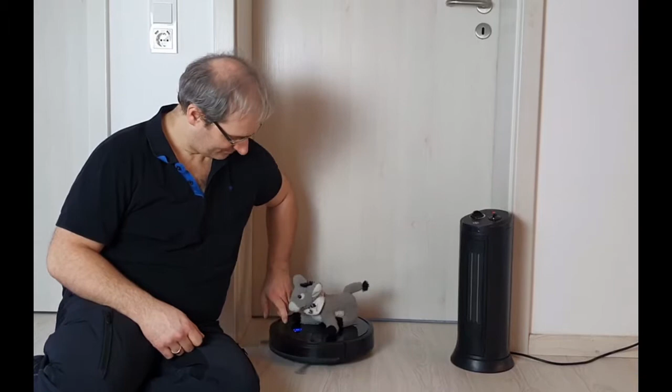You all use more or less of these devices with more or less automation. But if you think about automation, you have different things in mind. Nowadays, flying taxis, autonomous cars, or even home automation, where the light is switched on following you on your way to your office. But automation has different levels, and you will see that even these small devices have a lot of automation in it. I would say that automation is also something like the king's discipline in information technology. So we will have a look now into the subject of automation. Welcome.

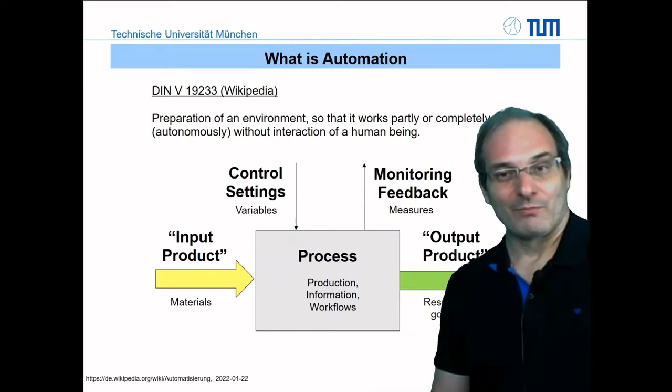This means that you will always have these scenarios - whether it's a cleaning robot, a completely autonomous radio telescope, or a robot in any factory, it's always the same principle. And therefore, if you think about automation, you will see that there are a lot of different levels. As I said at first, if you think nowadays about automation, you directly have in mind these autonomously flying taxis or whatever. But even a small heater has a lot of automation in it - it switches on and off according to the temperature, and for example, it turns left, right autonomously, and it can be used for heating without any interaction, but it's based on electric and mechanical components. So you have different levels, and therefore you have also different levels of tasks to do.

If we start with the lowest level, this is manual processing - so there's no automation at all. This is what we usually had in factories. Then you can change to the so-called batch processing. What does it mean? In batch processing, you still have a lot of human interactivity, but in factories you have these pipelines, so you have different steps and people work at these different steps. It's already some kind of automation, because the people are already supported by equipment. Then you have assisted processing - this means that, let's say, robots help you.

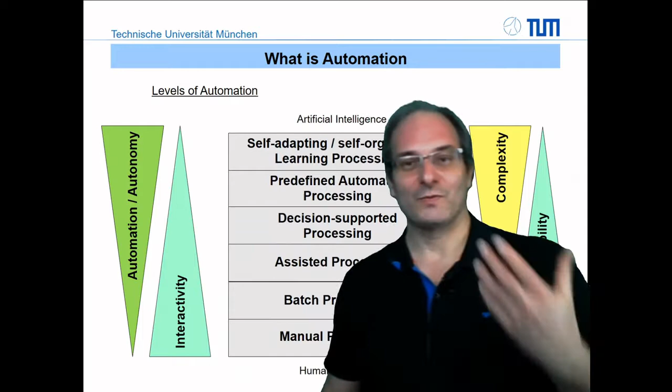So there are a lot of facts, a lot of things. We don't want to take care of these law and order things. We just want to take care of the computer science aspects, and therefore we want to have a look into these steps, what is necessary for automation and autonomy.

For me, there is a big difference between automation and autonomy, which means that the degree of independence and autonomy is really high and without failures, so that no human has to interact. Automation is everything where, for example, complete tasks are taken over and people don't have to take care of it. So like the cleaning robot, this is automation for me.

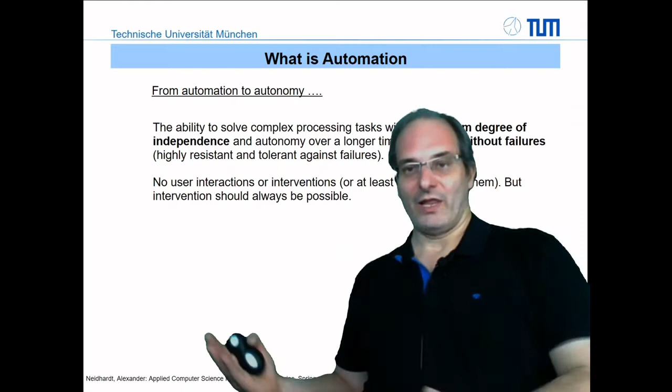Autonomy is that decisions are also driven autonomously, so no user interaction or intervention is necessary anymore. Even nowadays with these autonomous cars, this is not reached at the moment. But in cases like the airplane, intervention should always be possible, so the humans who are in the way to control something should be able to at least interact with the system.

And therefore we directly come to my defined units of automation, or at least then also autonomy, the implementation units, which I define as hardware driving, controlling, failure management, planning, and user interfacing. This is defined, I found this in one paper, and I adapted it to a situation based on my field of work in geodesy, for a laser ranging system.

So you have the laser ranging system. In this case, you have incoming data, information or products, such as which satellites are available, where the positions of the satellites are, things like that. And then you produce outgoing products, which are the observations, so the distances to the satellites or things like that.

And to do this autonomously, with these units, again with planning, controlling, hardware driving, failure management, and user interfacing, these are the center parts. Hardware driving and controlling is a very essential, closely related thing. Then failure management, which must be at least a beep or something that tells you an alarm situation is given. So all of these central parts are really essential.

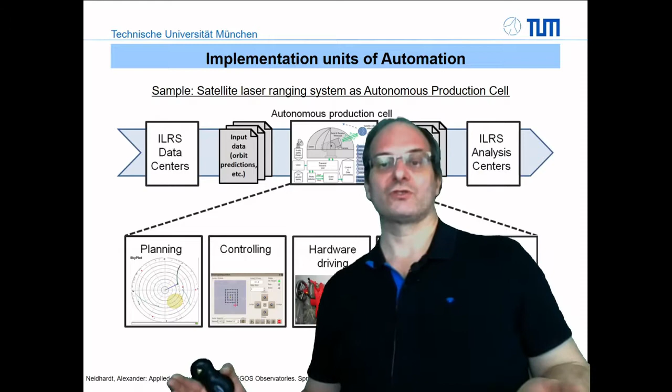So what is an autonomous production cell? An autonomous production cell controls selectively things to solve autonomous functionality - planning, controlling, user interfacing, hardware driving, failure management for specific tasks. And this is for the whole production.

So they decompose a complex autonomous production into small pieces, into small cells with self-similar small and manageable units, and keep the performance and characteristics of the whole cell for their smaller tasks. So you can have a complete view, always with these five parts of planning, controlling, interfacing, and so on. And then this huge view can be split into small pieces so that each single task in this complete autonomous production cell can be seen as the same setup again for a dedicated purpose.

So each cell is something like a copy of the central control facility and keeps itself alive. So it can be a hierarchical structure, it can be just one cell, or it can be a hierarchy, so that you always have a combination of cells in such hierarchy.

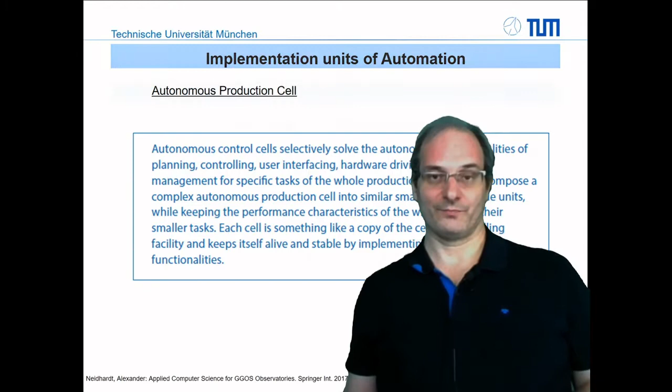So we did this for some of the observatory tasks, especially in laser ranging, but also for observations with radio telescopes. And therefore, I want to take a look into these special things like hardware driving, controlling, and so on.

So what is hardware driving? Hardware driving means we focus now on the real connection between, let's say, the software part or electrical part to pure hardware, like this gear here, or a huge motor or servo system.

There's a lot of work to do, and let's have a look onto this lowest level, and I would say this is regulation. It's not this what we think about automation - it is already automated, but it's more or less regulation. It regulates something according to incoming information.

So in this case, the simplest version is a heater. You saw it in the intro. It's a power supply, you have a switch, and you have a heating. If you have it in this way, it's completely manual. So you have an actor. This actor is closed, and then the heater starts to heat. It becomes warmer and warmer, but you have to switch off again.

So this is an on-off actor. This is the simplest version of an actor. On the other hand, you can have, of course, something like adjustable resistance switches, so that you have a possibility to do something like this.

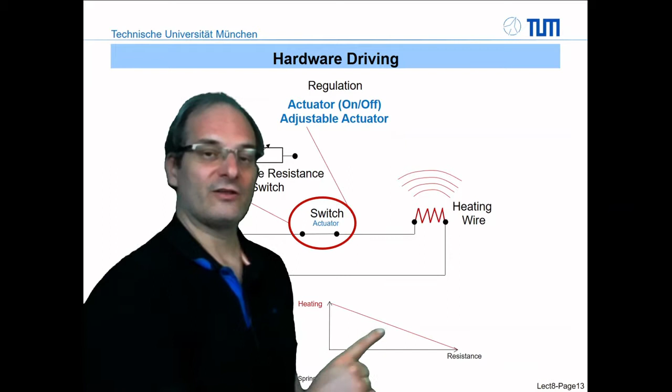For example, the heating or the power, the current which goes through it, is the highest as smaller the resistance is, and then you can regulate how the heating or how powerful the heating is. So therefore you have adjustable actuators and you have on-off actuators.

Let's focus on these on-off actuators. These on-off actuators are at this point manual. So you have to switch on or you have to switch off. But with a simple equipment, with a mechanical hardware, you can easily change this. So you take a bimetal switch and then you have an actuator.

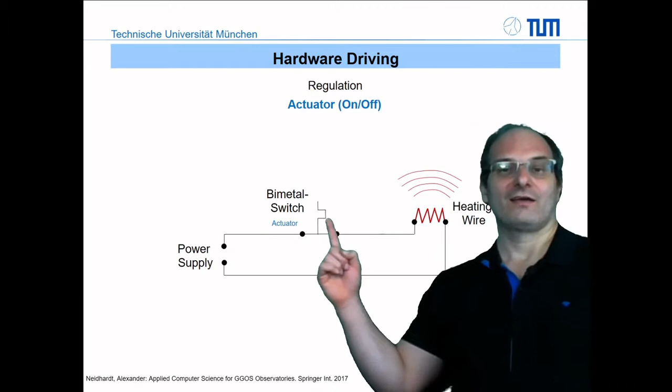This actuator can now be used for the heating detection. For example, the switch is closed, the heating starts, so it becomes warmer and warmer, and then this bimetal part detects the heat, and then it can switch off according to the temperature. So what we have now is a simple sensor combined with an actuator, and in combination with this you have something like a feedback loop. The temperature climbs up, and at a special temperature it switches the circuit off. So we have a sensor combined with an actuator, and this defines a feedback loop.

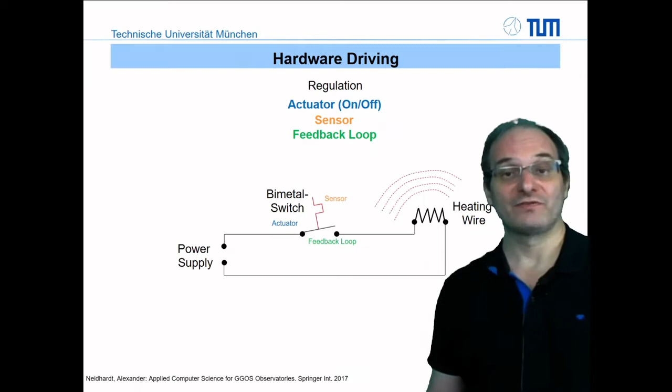So this is the simplest elementary form of automation. In this case, it's more what I would say regulation, because it detects something and it reacts on it, but it's the simplest form of automation. This is the low-level version of automation. In principle, what you have here, this bimetal switch, is a mechanical part combined with electrical switch and things like that. So you can have mechanical, electrical, electronical regulation at this point. It's really, let's say in most cases, hardware.

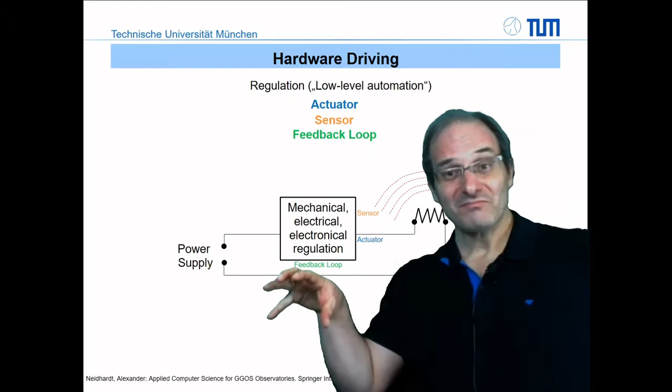This is also what you have in very complex systems. On the one hand you have the physically controlled system, the thing you want to regulate. Then you have the actuators, which are in principle a conversion from special voltages and currents. So you have a converter from a digital to an analogous signal, then a servo driving system which matches it, and then an actuator element which controls the physical device.

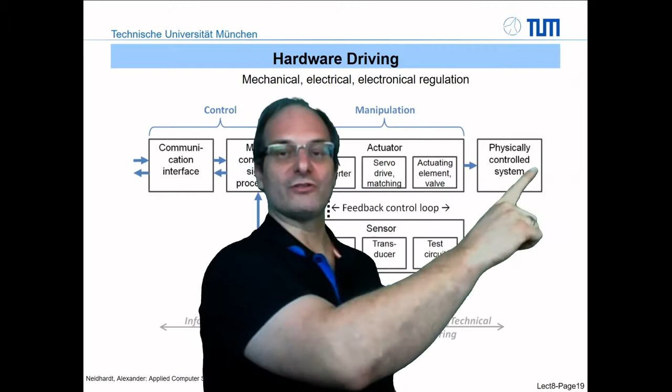On the other hand, you have the sensor. The sensor detects this, and there are test circuits that detect this physical equipment and convert it, like a converter, into a digital signal again. This is the feedback loop to, let's say, a microcontroller.

In the first sample we just had hardware, just electronic or electric parts, but in this case we already have a microcontroller processing these things, and then you have a communication to control all of these pieces.

Let's look at it again. This is the basic part of communication with a physical device. On one hand we have the physical electrotechnical part, the physical controlled system with all the circuits to convert between a digital situation and a physical, mechanical or hardware-based situation. On the other hand, we have the information technology, the engineering for the computer science stuff.

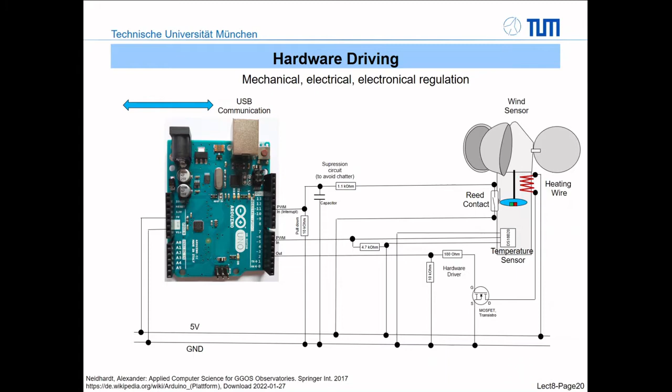Let's have a look at a small sample for that. We want to do the regulation of a wind sensor, and we want to do it already with a small microcontroller. So what we have here now is a microcontroller, in this case an Arduino, and on the other hand we have a wind sensor.

We have this wheel here detecting the wind, not the direction but only the wind speed, and it detects it with a very simple sensor. It's a reed contact, which uses a magnetic part—this magnetic field switches the sensor and produces pulses, and these pulses can be counted. If you have these counts you can convert it to the wind speed, directly to kilometers per hour or meters per second.

What this sensor also has is a temperature sensor. With this sensor you can measure the temperature, and you can use it for switching a heating—for example, in a winter situation, so you can melt down snow or ice from the sensor. So what do you need now?

You have on the one hand the IT, and on the other hand the hardware. You need something like a conversion, and in this case we do it with a very simple circuit—just a few resistances and a few capacitors, things like that, or transistors or MOSFETs like here.

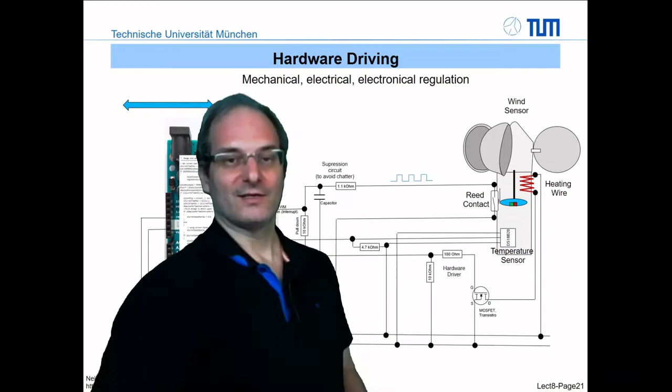Here runs a program, software, which reads from the sensor and converts it to commands or switching pulses or switching situations of the heating, for example. It counts the pure data required with these pulses, and it also regulates additional parameters like the heating. For the heating, on the other hand, I have to jump to here.

On the heating side, you have to think about special behaviors, like hysteresis—so, for example, the heating switches on at 0 degrees, but switches off later at higher temperatures, like 1 or 2 degrees, so that you avoid constantly switching on and off if the temperature is not stable and just toggles around 0.

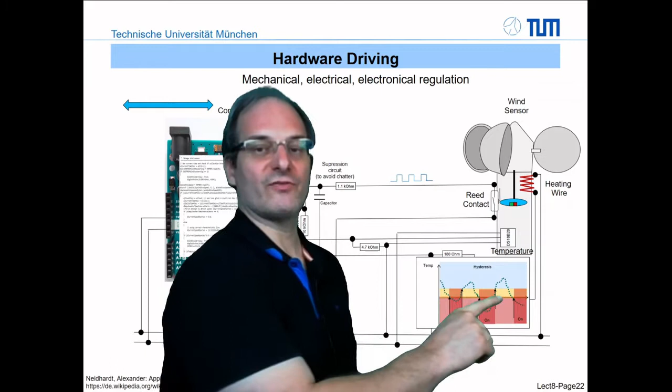So you have special periods where the heating is switched on, and special periods where it is switched off. The switching on happens at 0, for example, and the switching off happens at this higher level. You have to think about this in your program and deal with it, and you have this conversion so that you can control the hardware with your IT on the other hand.

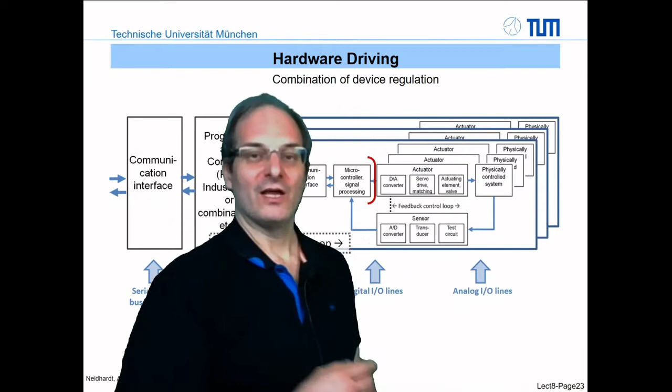So with this microcontroller and the communication, but now you have a higher level communication, and also more CPU power, more throughput. What you have in this scenario is you still have feedback loops. So you have a low level regulation loop, and a higher level that's still a regulation loop. This is the difference, it's a flowing difference.

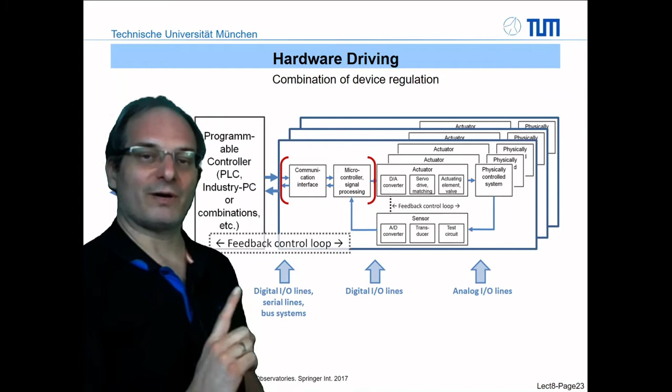So if you think it's complete automation at this point, or if it's just regulation - what you have in this explanation is these analog I/O lines, these digital lines, and then high level buses or communication equipment like serial communication lines or bus systems, and here maybe you already have Ethernet. So step by step you reach a higher level of automation - a higher level of regulation in this case - and you can also already integrate higher level automation decision making. It's a very fluent process.

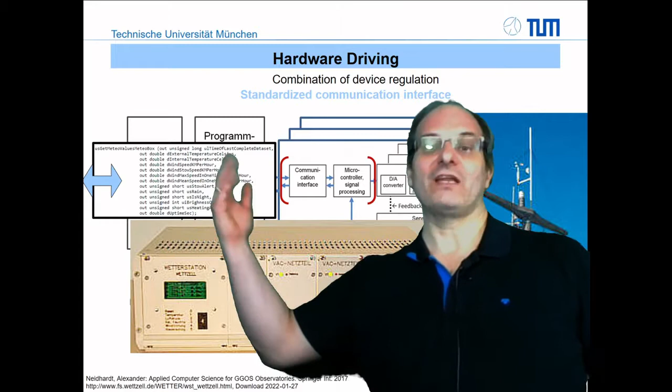As I explained, this is now the situation of a meteorological station or weather station. You have again a program with clearly defined interfaces, which combines a lot of the sensors. So you not only detect wind speed, but also this heating control and detection of current temperature - this must not be part of this high level part. It can also already be part of this hardware regulation. But if you also want to detect if it's raining and if it's cold, so that you can guess if it's snowing, then you need information from other sensors, and then it can also be part of here. So it depends on the developer, what and where these parts are realized and implemented.

So this was hardware driving - this is the essential lowest level part, and most of the work is to design and write things for this adaptation to the hardware.

The next step is controlling. I already told you that controlling can also already happen here in the hardware driving - it depends on the design. But what I think about controlling is this high level control of a lot of these hardware things. So you're now at a very high level, and here I would say is the real automation, what you think is automation.

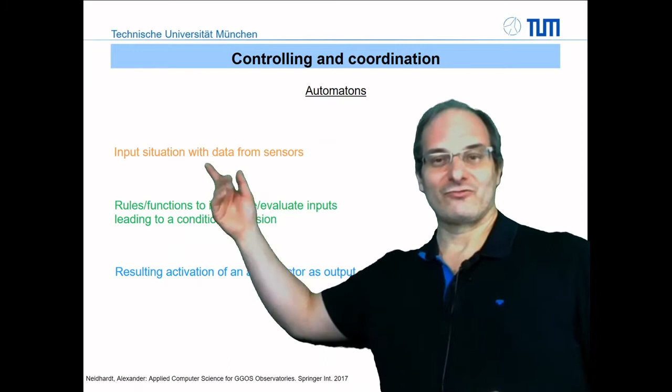Controlling is really closely connected to hardware, and it's also really closely connected to failure management, so it's a very essential part for the control. What does it mean? It's exactly what I explained about automation or regulation - the same step again. So you have input situations, input signals from sensors, from this complete hardware - it's not totally the sensor anymore, it's something on a higher level.

You have rules and functions, but higher level rules and functions to interpret and evaluate these inputs and to guide conditional driven decisions. Then you will get a result, an activation, or something which is the output of this device. You should already know something like that, because we had it in our other lessons. Do you remember?

You have input, you have something which defines what happens with this input, you have clearly defined steps and functionalities, and you have output, and then also the resulting movement of the read and writing head. We have this in the case of a Turing machine, a state machine, an automaton. We had this already for languages, for the detection of languages, but you can use the same principle also for these automation things.

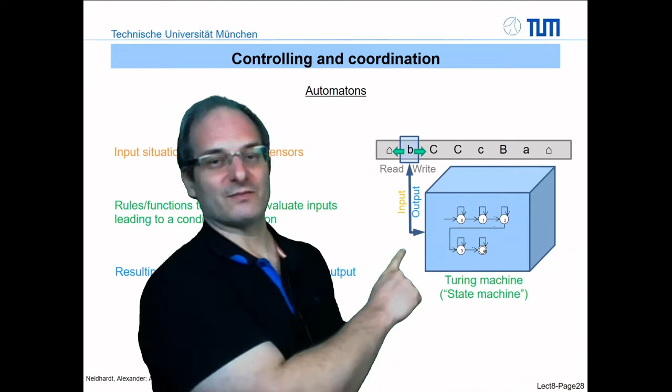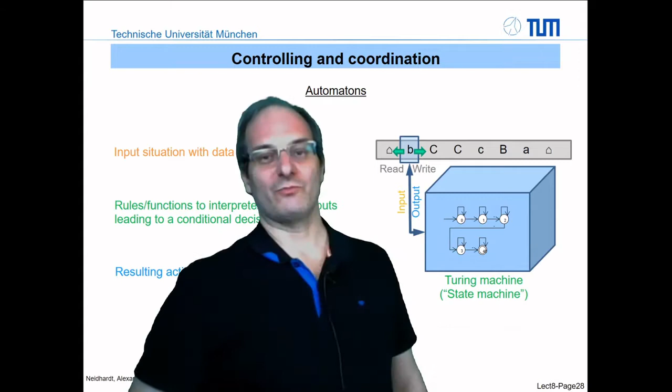Maybe not as a pure Turing machine, because this theoretical construction is too bulky for real implementations, but the principle is the same. This idea of using inputs, going through a clearly defined set of states, and then defining outputs is the same. So what do you have?

You have something like a loop around this state machine, about these states. You have input, you have also memory. In the Turing machine you have these clearly defined tapes - this is the theoretical construction, but here we can use any type of memory. We have inputs from the devices and we produce outputs. We send something to the device, to the actuators, and we also store something on our memory. So you have a state machine, a continuous feedback loop, and you follow the steps according to memory situation and the inputs.

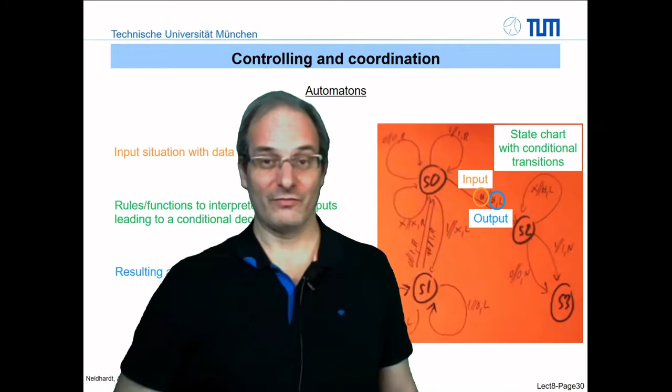So this is what we have, and you already saw something like that in the theoretical computer science part about language theory. We had input, we defined the input with these things. We have these arrows, these edges between the states. We have clear states, we have clearly defined end states, and for each arrow, for each transition, we have clearly defined outputs which tell us what is the action or reaction on this input. So we have a conditional transition which defines all of these runs or paths through our states.

If we do this, we will always be in a clearly defined state. It cannot happen that we are in a situation which is not defined. It can happen that we will not leave such a state anymore because this transition is not defined, but it cannot happen that we reach a situation which is not defined here. So for failure management it's essential.

The conversion from this to here, I already showed it to you in one of the samples, to program this conversion language. What you have is a while loop, a never-ending while loop, and you have these switch case states, and at each position you have a conditional decision which defines the next state. It also tells the tape or the memory what is the resulting product or resulting information, so the output, and then it jumps to the next state.

So if we are in state 0 and if we read this, then we jump to here. The same is for a robot - if this happens, then do this. It's a continuous loop, and you can define clearly all of the states.

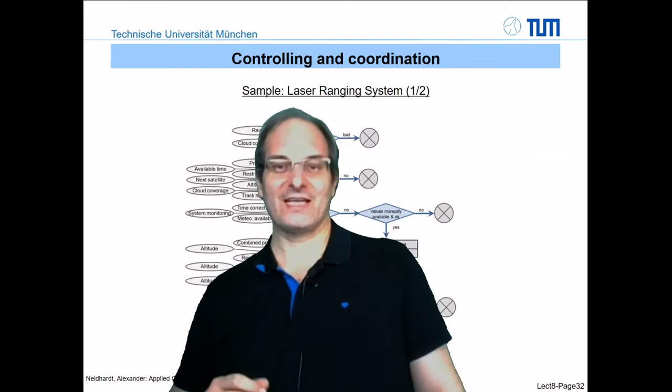For real complex systems, the states are much more complex. What does it mean? For example, for a laser ranging system, we define these states - this is a decision table. Here are the decisions, here are the inputs to the decisions, and this is the run through these steps.

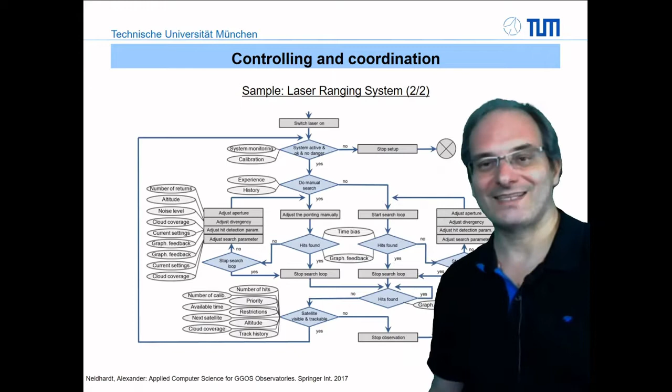These are actions which happen here, and these are decisions which are made. There are a lot of decisions to run through, so that the laser is switched on, that all of the detectors are switched on, that also the detection runs, and that detected hits - detected laser hits to the satellite, for example - are found. So it's a real complex thing, but in principle this flow chart is nothing more than a state diagram, and it continuously runs. You have special end states, special situations where it stops. This is a sample for a real high level complex system.

Each of these decisions, each of these things, is then a lot of small equipment accesses. There are a lot of device accesses, a lot of pieces of software and hardware, so it's not really simple. But the principle is always the same, and it still follows this layered system.

We already had this very low level actuator sensor system, where we have electric things. Then we had this high level programmable logic, and where we are now is this part - on an industry PC or high level computer, we have a very sophisticated control loop, where we also take care to control the timing, so that we don't propagate time or delays from the lower level sensors to higher level decisions, and that we have higher level detectors if something goes wrong, like watchdogs or safety devices, and that we really protect our data.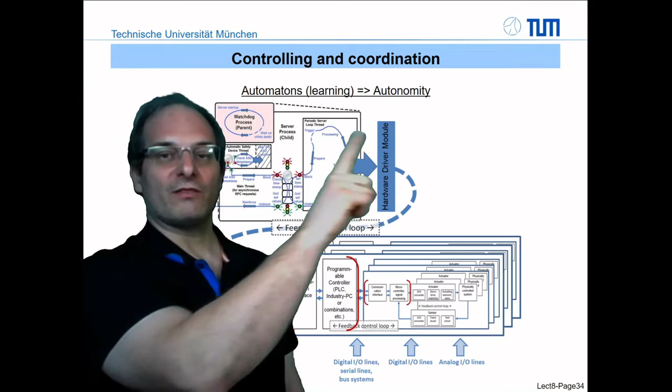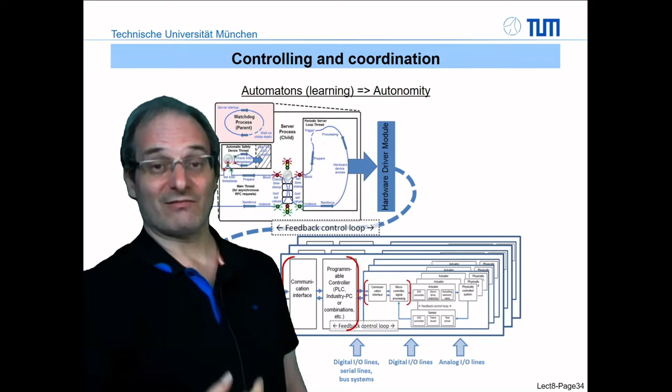So this is a loop running all the time with the states, with the state charts, and then we run and control via this way the lower level regulation. This is where it's split between automation and regulation. This part is a fluent process, so here you have more or less regulation things, there is not so much combination intelligence, and here you have this higher level automation. So on the way now, we are already really highly automated, but it's a really static process.

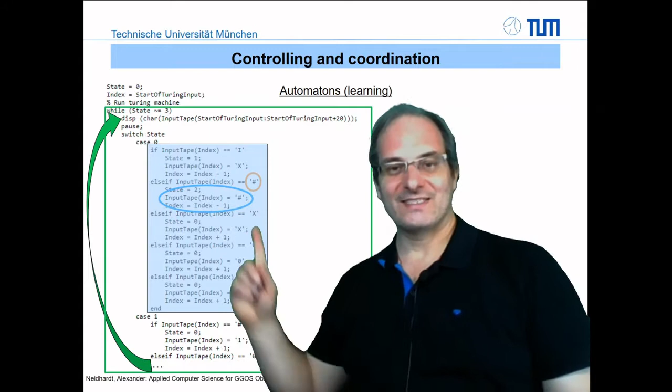So what is now the change to autonomy? The autonomy also happens at this higher level part, and it's combined with a learning system or with an intelligence system. So we have to take care of these state changes, and these state changes can be driven or implemented with a different solution, like with these systems of neural networks or other deep learning or learning mechanisms.

So therefore, if you not only use a really static run, if you adapt to different situations or to a learning set, then you can adapt your processing to a specific situation, or you can adapt it so that it's really, really efficient. Okay, so what does it mean?

The selection of the following state is now made by neurons. It's just a small outlook into these neural networks. It's a huge field again, but just so that you get the idea.

The idea comes from the human brain, so you have something like activation functions. You have something like a piece of software or equipment where you have a lot of inputs, and these inputs are weighted, adapted with some weights and can also be biased. Then a sum is created so that you get at least one number. From a lot of inputs, depending on how many inputs you send in, you get one number, and then you have something called an activation function, or sigmoid function can be used, which then decides when the output goes to a special level. It can be a binary level, or it can also be a probability or something like that, so that you have inputs and outputs again, and this is more or less automatically adaptable.

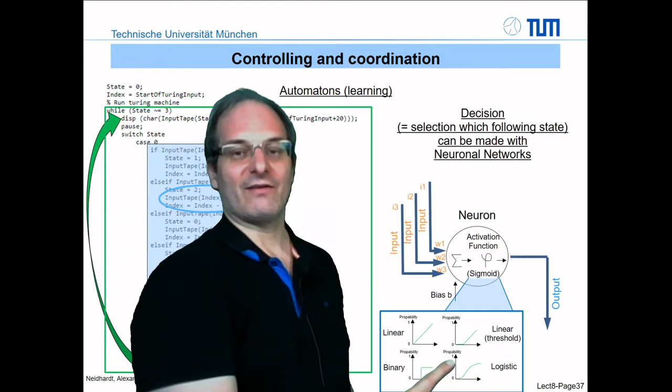So what happens here, you can have different functions, and this is the special thing where designers for neural networks have to look in. They have to use different neurons, different activation functions. For example, you can use linear with a threshold, you can use binary, which just switches on at a special input or state, or you can have these logistic functions, the sigmoid functions, so that you have different possibilities. Now this combination of different neurons - it's not just one of these neurons, you have a lot of these, and this is also why nowadays this artificial intelligence or neural networks are so popular, because now the hardware and the computers are able to work with a lot of these neurons.

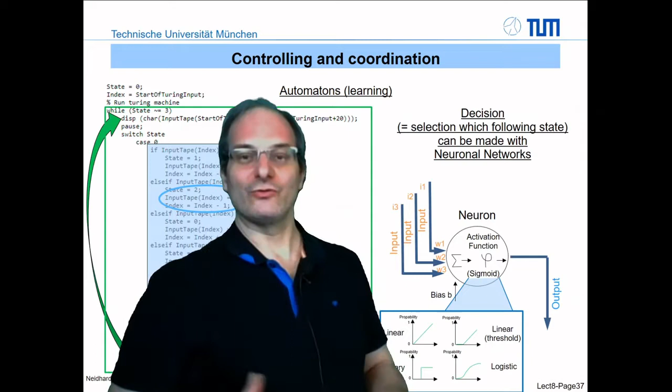So it means that you combine a lot of these neurons. The output of one is the input of a new one, so that you produce something like a brain. Well, it's not really like that - you define the network, but you can thin out or improve or make more important one of these edges between the neurons. So you have input layers, hidden layers in the middle, and output layers, and then you can drive some special outputs so that you can make decisions like for the selection or detection of signs or something like that.

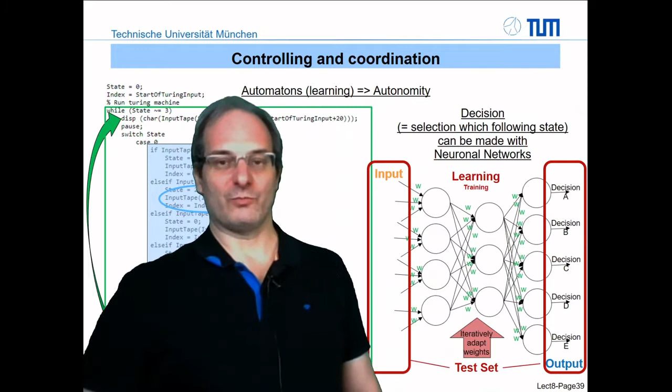So what happens now is you define a set of inputs and a set of outputs, because these neurons, these weights, must be adapted to a given situation. So the neural network must learn, it must be trained. You run through these sets so that the weights are adapted, and then a special input scenario with a special probability will lead to a special output. So therefore you have the learning step, and after the learning you have the processing step. With these weights, new situations are evaluated, and therefore you can adapt to special situations.

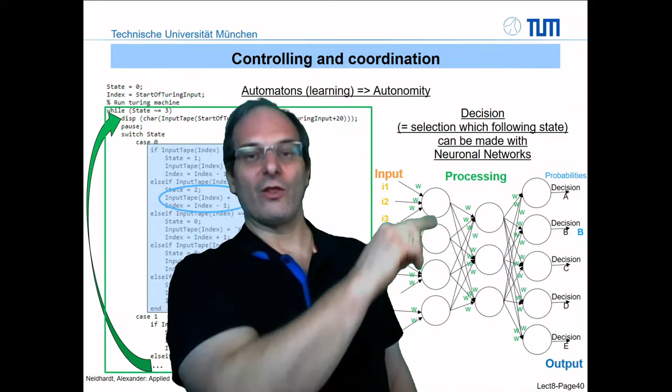So for example, you can build something like artificial eyes, or you can detect handwriting, things like that. And if you continuously learn, for example, if you use new inputs for learning, so that if something goes wrong and you get feedback by users or something like that, then you can always improve the situation.

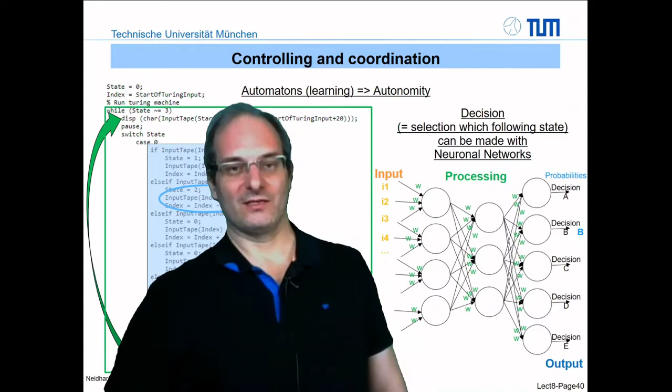So even with search engines using these neural networks, there are people behind detecting if something goes wrong, and they feed in information so that the neural network or other artificial intelligence techniques will be adapted again to the right things. Okay, so what you get then with this, this is now what I mean with autonomy.

Autonomy means that decisions are driven by the system, so it's automation with no human interaction.

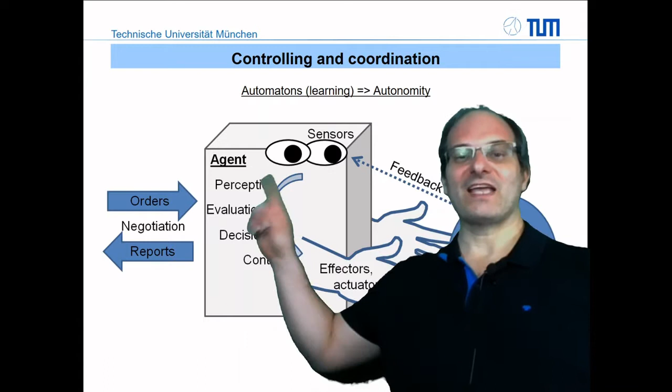So therefore you have something like a so-called agent, and this agent takes orders and brings back reports to the human or other agents. But what does it do? It uses different sensors, so in these different hierarchies, as a feedback from the environment, and then it makes a perception, evaluation, decision, and control.

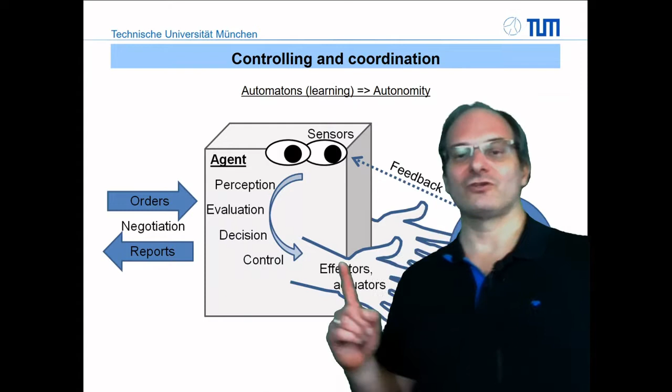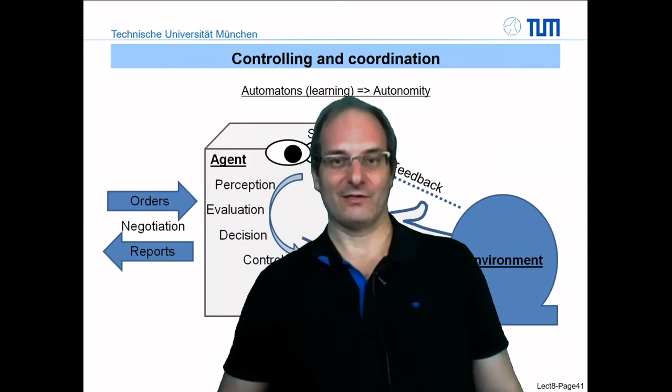So here is the neural network or higher level state chart or state machine, and with this control, effectors and actuators are forced to do some actions. So you have a higher level feedback loop, and if you go back to these different levels, you have the lowest regulation level, mainly hardware, then the automation level where you have state machines and things like that, but with some human interaction, and then this high level autonomy. This means we have different levels with different aspects of human interaction and activation.

Very important here, in combination with these two things, is also the failure management. Because if there is a failure, and if you have a completely autonomous machine or autonomously running machine, then it can happen that a failure costs life or influences human beings, and therefore this failure management is a very essential and closely connected part here.

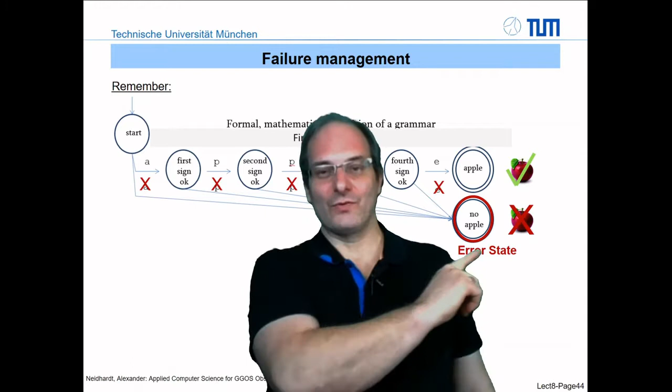You directly see that you already maybe have an idea of what failure management is, because if you go back again in our lessons and watch the state machines again, we usually define something like this error state. Even if we didn't directly point it out, each not-given situation, each not-given transition - a transition which is not possible - will lead to such an error state. So this is the lowest level of failure management: if you cannot do the transition, go to an error state and stop the machine. Stop.

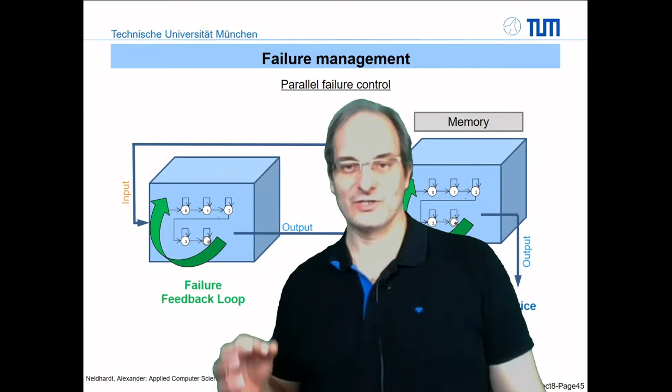Another thing is that you can use different levels of automation so that you have a parallel failure control. Here is the normal feedback loop, and on the other hand it can also use memory and things like that - you have another error or failure feedback loop that checks the inputs from the devices and combines it to a logical situation. You can use fuzzy logic, or neural networks, or just simple state machines, but it drives to an input, and this input is like all of the other inputs which influence this process. It can change the processing, or stop the machine, so it really influences the system, but it's just an input from a parallel error control. Additionally, you have of course the already mentioned state machine errors inside of both of these, so that you have controlling of these scenarios.

A simple example is here also from my daily business. Important is that errors or quality values for the processing can be converted to a metric system, so that you get numbers which tell you something about the quality, about the situation, so that you can drive decisions from that. Here, for example, in our monitoring system, we have these decisions - it's a combination of logical conditions, and if this condition happens, you have special alarm levels or severities.

In our case, we defined 4 scenarios of severities. Everything okay is green. Situations where we should be informed that something goes wrong, influencing the quality of the product so we won't have the same quality anymore, or warnings, meaning we won't have the product anymore, but still no situation where human beings are in danger, for example. So if we have this warning situation, we can reset special devices, or run through troubleshooting rules.

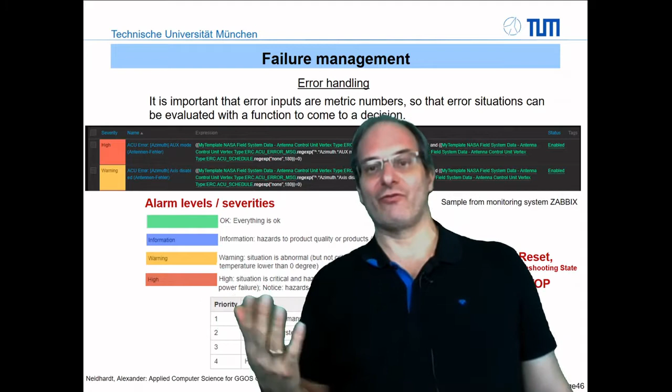The final severity is the highest one, where human beings or the machine itself is in danger, and this always leads to a stop. So we convert input scenarios, different digital parameters, to scenarios where we can drive decisions, and then we can at least define situations where we have to stop or where we have to run internal troubleshooting mechanisms.

So this means we go through these parts here. We define hazards to humans, hazards to systems, hazards to products, or to the quality. So these are our main drivers in our case.

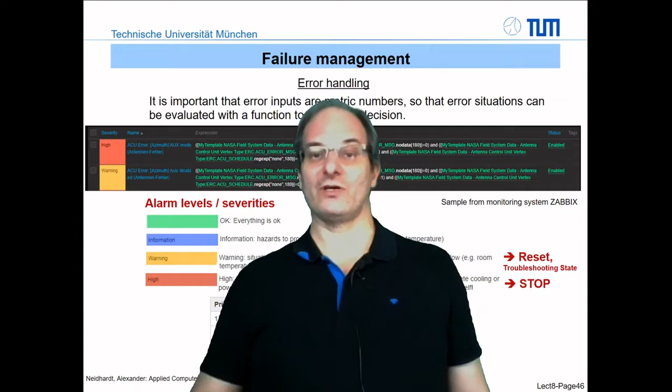And this is the elementary failure management. So here you have another state machine, but you will come to situations where you have to stop. And even in autonomous cars, you have this situation. For example, in some cases you have to stop if you cannot come to a functional result anymore.

Let's have a look into the next step, which is the planning. These three parts are close together. All autonomous or automated machines need this. The planning is the general schedule for all of these things, and it can also be done with autonomous systems or with state machines, or it can be just something like a timing. So what does it mean? Planning is the timing for the rest here.

This means that you need a central equipment which plans the complete workflows of all these autonomous production cells. So it's the next layer. You have a lot of these small devices, then you have these high level PLCs or combinations of the devices, then you have this high level automation, or also this completely autonomous production.

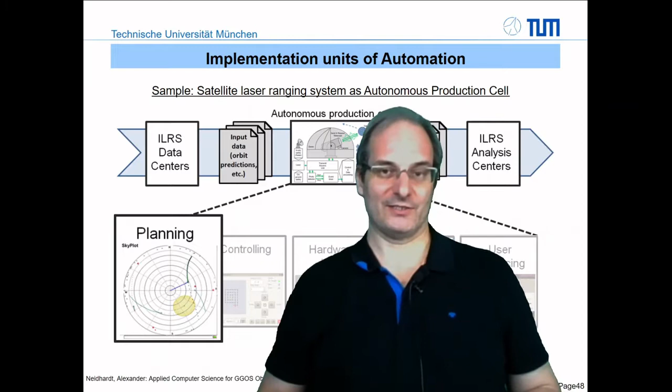And then you have the next level which controls and organizes the workflow through all of these production cells. And this is especially what you have in this equipment for the observation as well. You can do this again with a state machine, but you have to think about which possibilities for a time schedule you have. For example, if you have a cleaning robot, then you can decide that it always should start at a special time. This is already planning - it always defines a clear but static a priori start time.

What you also can do is use special sensors if possible, and start the robot only if it is really dirty. So if your flat is really dirty, you have a dynamic, but it's still a priori situation - it defines it, the whole processing is the same, but it now adapts to the situation. Or it can run through the whole house, and at the places where there is the most dirt, it will stay longer, adapting to a dynamic situation.

And this is what you can do for the planning. You can have a static a priori, for example once defined by a human being, or you can have dynamic a priori, or dynamic real world real time scenario. Static a priori, as I told you, is like an alarm watch - it regularly starts the same schedule of tasks. Dynamic a priori means at special time periods you plan the next 10 or 5 or whatever hours, and then you follow this path statically.

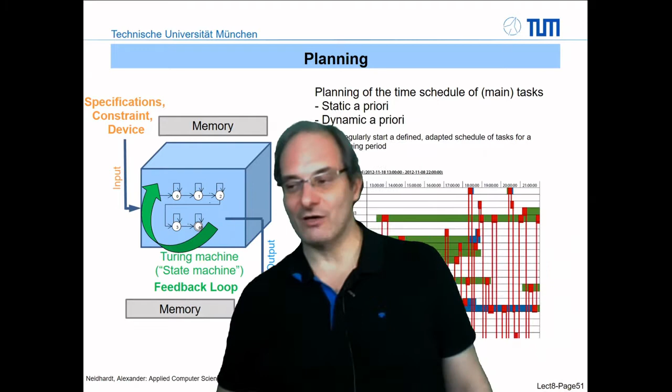So you don't think about it anymore - you use the current situation and you plan it. You have a schedule, a path through different scenarios, and you run through it. It regularly starts defined but adapted at a special time period, a fixed schedule of tasks which is fixed for the coming period. The dynamic real time approach always takes inputs from the sensors, the current situation, and adapts the next steps. It decides when to change.

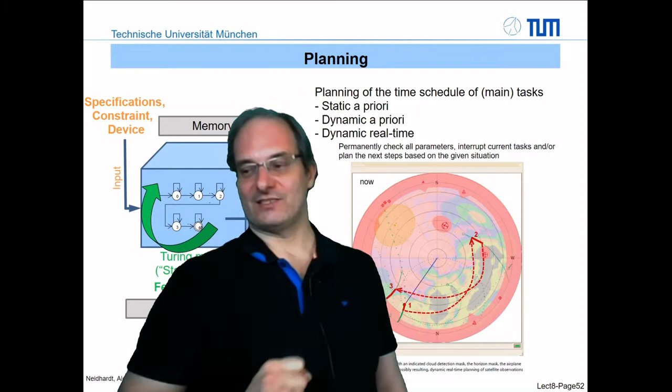For example, here we have a meteorological situation of cloud coverage, and it decides which satellite is used when, and it always checks. For example, if no hits or returns from the satellites are detected, then it again changes to the next satellite, maybe to this one, and continuously detects it. So it's a permanent check of all parameters, so that current tasks can be interrupted, plans can be changed, and new situations can be forced by new decisions.

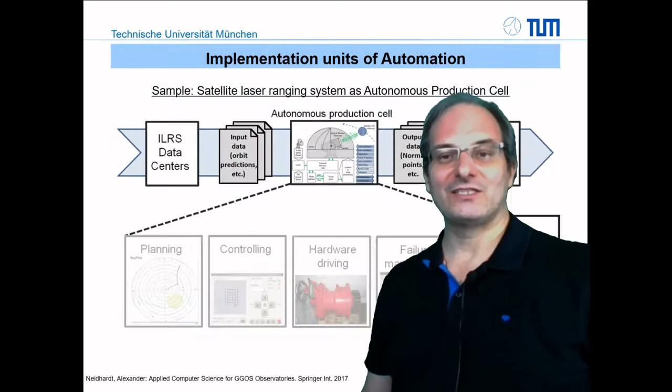So these are the steps, and of course users have to know about what happens inside - in the hardware, the controlling, the failure management and planning - and therefore you need a really nice user interface. Nowadays user interfaces are really important, so we are now at this part, the autonomous production cell, and nowadays user interfaces are mainly based on web pages - some kind of special web page, static or dynamic.

So in this case, this is the web page for our radio telescopes, or you have also a web page for our failure management system, for the system monitoring, so that you see if there are failures and you directly detect it, at which building, for example, a guard has to go to change, to switch things and work with it. So these are parallel systems.

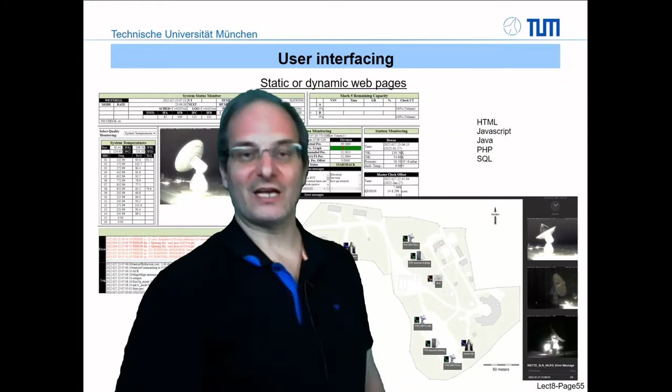For example, for the real control, we have this scenario, so separate error detection is used for the real processes here. In this case, you have to know something about HTML, which is why I told you something about HTML in one of the lessons before. But this is what you did not learn in my course: you also will have to use JavaScript, Java, PHP, or SQL, because if you want to connect something like databases, you need this connection language, this interface language.

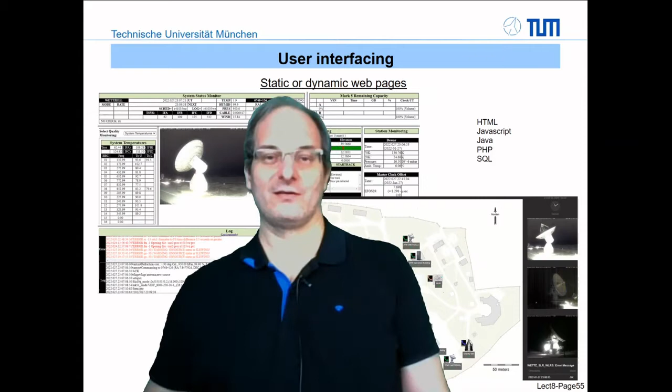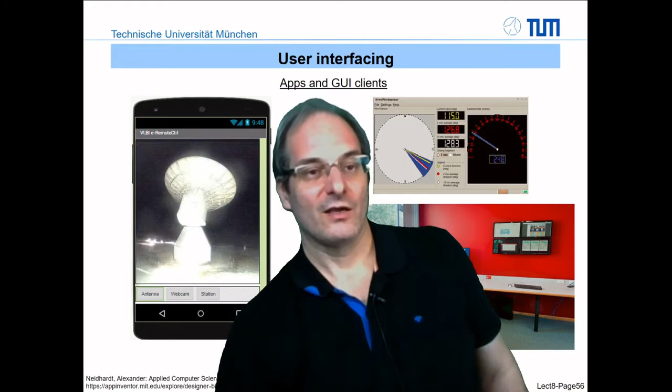So if you have this, you have to think about how good your automation is, and therefore you have to think about simulating your programs. You already know something about simulation. We talked a little bit about this during the discussion about algorithms and also about software development, and it's very similar to that.

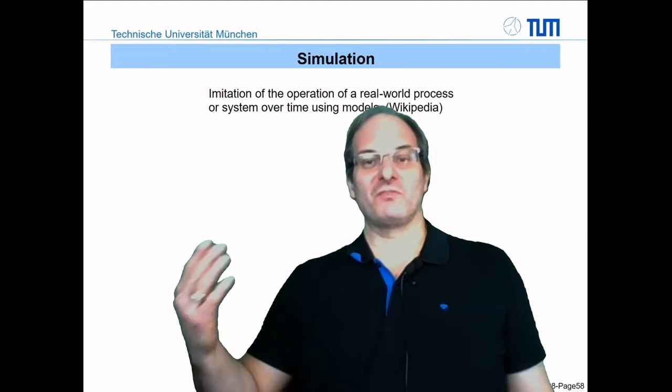And therefore we can use the same principles. So what is simulation? Simulation is the imitation of the operation of a real world process, and we do this in an artificial environment, and we check how this real world process acts or reacts over time. For that we have to use special models, assumptions, and special models.

So in the best case, before I do some theoretical explanations, I'll just show you some samples. They are based on things like that. Remember we had this for software development. So the earliest position to do a simulation will not cost too much money, because if you've already produced some hardware or software, then simulation is quite expensive. So therefore you have to think about how good your algorithm is.

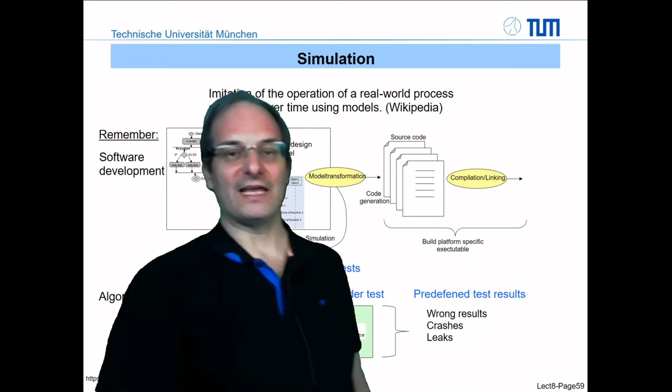And we did this check for the algorithms. We had this function under test. Now we have the system under test, and we enter the test cases with limit values, min max values, extreme values, or illegal values, things like that, or random values, so that we see if there are wrong results, crashes, leaks, or something like that. This means we will have the same classes as for algorithms. Do you remember? Correctness, functionality, or partial correctness, and also compared to efficiency and performance. So it's not only that we test if everything works correctly, we also want to see how efficient our autonomous working automation is.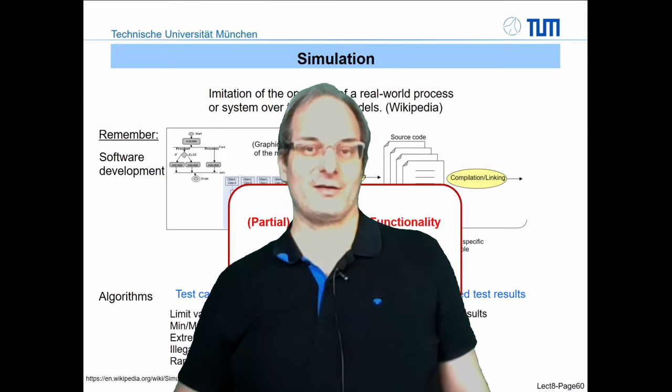Okay, so let's have a sample. As I told you, let's look into a sample. So we have the situation of a cleaning robot. We have a room, a theoretic room of 100 by 100 units, and we have a starting position of our robot, and a starting direction of our robot.

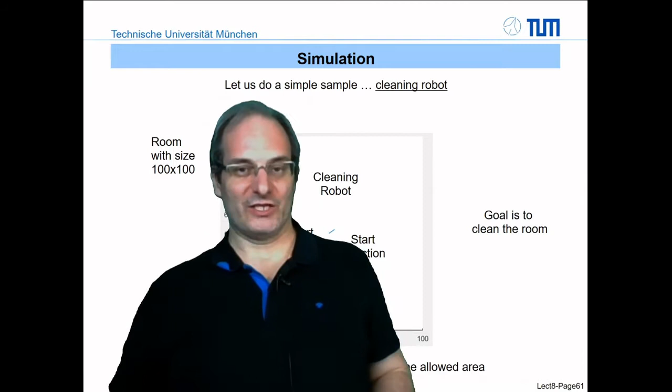Then we have to define a goal. So the room should be cleaned. Almost all positions should be touched once, and we should not touch positions several times. At least the room should be clean, and therefore we have to define an algorithm and a simulation for this algorithm. So we simulate it without any robot.

So we simulate it here in MATLAB, with a MATLAB program, and therefore our task or our state machine is quite simple. We have a starting state, and this is already the state which is kept, because each time, under this condition, if we reach a position outside of our room, we turn, for example, 90 degrees, or some degrees. So our first attempt is this simplest suggestion: if there is a wall, turn left.

Okay, so let's simulate these things. Let's simulate what happens, and we can do it step by step. I will directly show the outputs. So this is the small program. The small program defines some initial parameters.

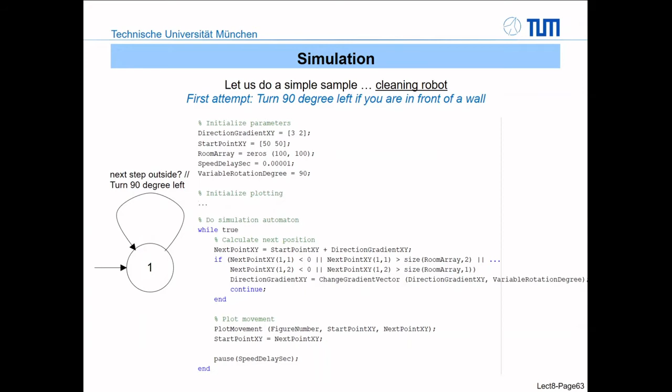So for example, we define the direction, the starting point, our room, and how fast the steps are, and which rotation degree we use. In this case we start with 90 degrees, and then there's a while loop that continuously runs. It's quite simple because it's a state machine: it checks if we're outside of the room, and then does the rotation. The rotation is done with a rotational matrix, and then we plot the current position or movement.

So how does it look like? If we do this, we have a starting situation, and then it continues to work to the first position, and continues to the next position and so on. If we reach this wall, the end of the room, then we turn left. It continues and continues. And if we watch this, we will see that after a special time period, it will always follow the same way.

So our first attempt to clean the room was not really successful. What else can we do? In this case, we reach what we already know, which is the halting problem. We don't know when this problem appears, so we don't know after how many steps it will appear. But in this case, our process will never stop because the room is not cleaned, and therefore it will always continue the same way. This halting problem you can find in the algorithm lesson.

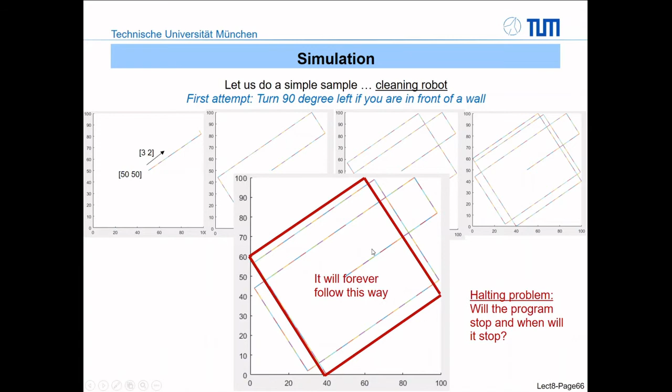So let's do another situation. In this case, we change the direction and we change the position. You will see that the halting problem also appears, and it will appear quite early. This is what's difficult to detect, when this situation happens. But all of these simulations show you one thing: that this first attempt to always turn 90 degrees is not really a good way to do this.

So let's change - maybe don't turn 90 degrees, let's turn a small degree, like 5 degrees. What happens now, in principle, is the same: it will toggle a little bit around this predefined path, but it will never leave this path anymore. But will it really follow forever? Again, this is the halting problem - you cannot say if there will not be a situation where you leave. In this case, it will - there will not be a situation where it always follows this way. You can play with these programs a little bit, and you will always see the same situation.

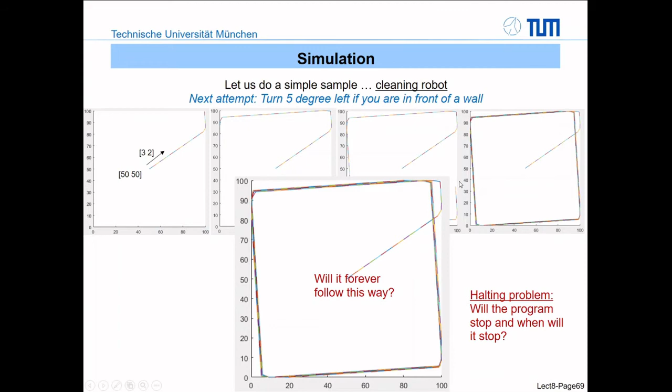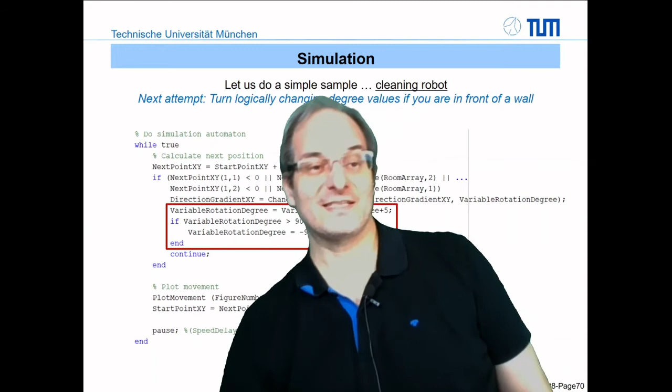So let's bring in more dynamic - more dynamic situation means we change the rotation angle each time we bounce against a wall. Let's start with a small rotation angle, then change to larger, then smaller, and so on, so that we turn left and right, but it always still follows a predefined state, and therefore it's clearly defined that you always have a small change in the rotation - it's not completely free running. Okay, so let's see what happens here.

If you run this, you'll see it looks quite nice. There are a lot of different lines, so the number of lines grow, and therefore it seems that now it really works. If you stop after a special time, it looks quite good. But does it really solve the job? And how fast does it solve the job? So therefore, our simulation at the moment is not good enough.

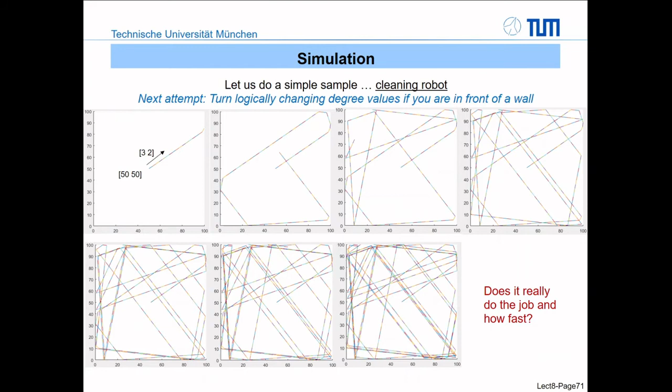So we now change logically dependent degrees, and we don't know if there is this halting problem again - if we will always follow the same path, or if it will change so that all of the positions will be touched once. Therefore, we have to change our simulation and algorithm so that it does not plot each step anymore. We want to run 100,000 steps, for example, and see how many positions are touched. It should run the whole simulation so we can change the number of steps, and each step should also be normalized - before we had different numbers of steps, now we just go 1 unit per time unit, so we have a more realistic scenario that we can use to compare different algorithms.

We will register all visited positions, so we have to set some markers, and we also have to set the markers if we touch it more than once. So if we visit positions several times, we have to see this. And we want to show these appearances, or these touches of different positions and the repeating accesses, visually with different colors.

Then we want to print the number of visited or not yet visited positions, and also the maximum number of repeating visits. So that we get some information to detect - this is what I told you with metric - we need some quality parameters which you can really use to evaluate our algorithm.

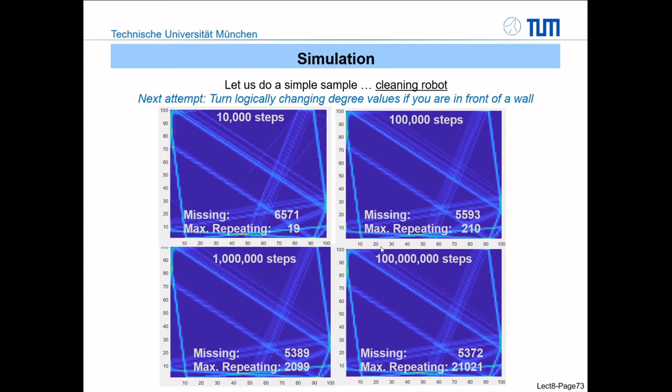So what does it mean? With additional information in this simulation, we see that our algorithm does not work, but we still keep this simple algorithm and just change it very simply. We do randomized processing - instead of changing the degrees periodically from -90 to 90 degrees, we now completely randomize, or do a randomized calculation of these degrees.

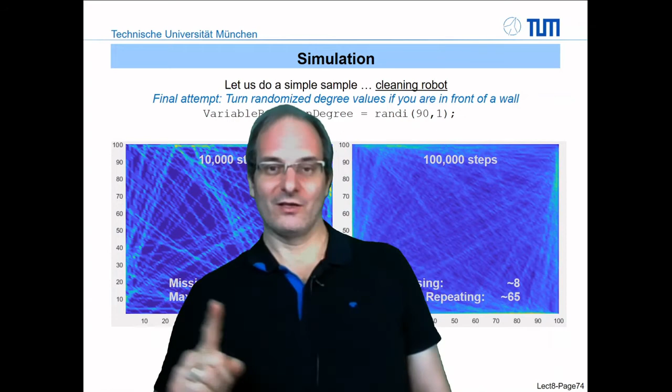Why did I make this about sign here? Because each run is different. So it can happen that you have hundreds of missing positions in one run, but now we have to evaluate in the mean how good it is. You can reach really good runs, or you can get, let's say, not so good runs, but compared to the previous one, this situation is much better.

And you can also check or make the situation a little bit more complex. So let's have a look if we put in some furniture - if we put in an additional rectangle and we want to clean also the inside, and we have just one small gate.

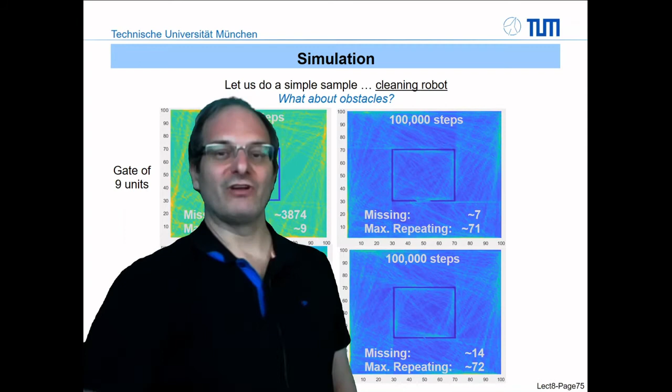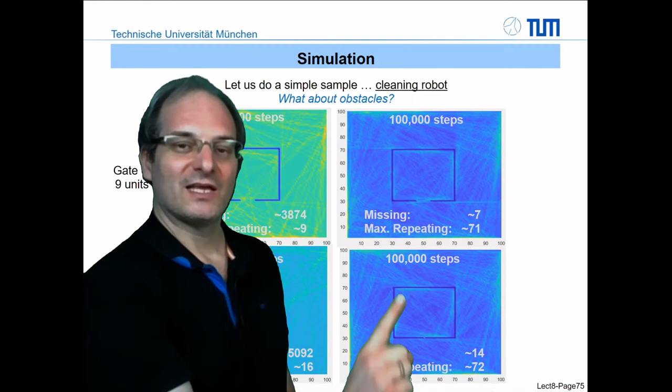The great thing is that it doesn't even change if the gate is just 1 unit anymore - just a very small hole - and you see a lot of repeating. The lighter parts here are repeating visits, but again with 100,000 steps you reach a real good result. If you let it run, maybe you have 500 missing positions, but even with a very small hole here you reach a real good result.

And this is why cleaning robots really work. So with just the bumping sensor, you can reach a real good result.

Now you can think about making this scenario better and better and better. But in principle, the simplest automation with about 80 lines of code and with a very simple strategy gives really good results. And this is what I think is really amazing.

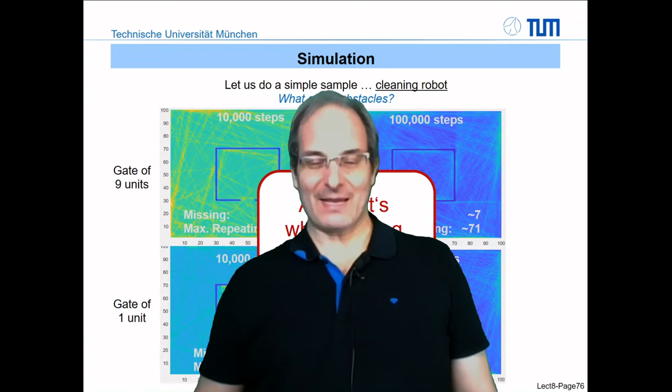And this is what I really like in automation - you can reach a huge step of automation with a very small program with a simple idea. So with the simplest ideas, sometimes you reach large results, and with the best plans, sometimes you don't reach the real things you want to reach.

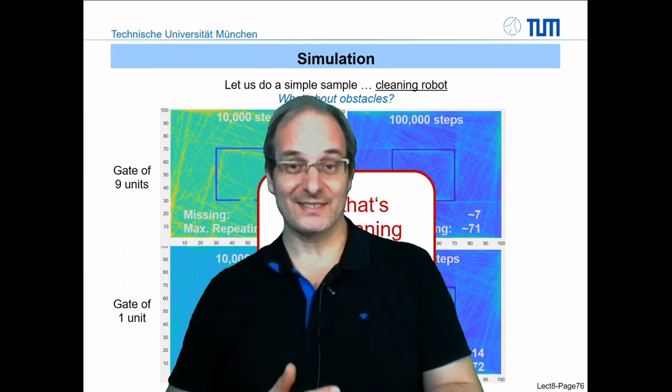So therefore, this is my lesson about automation. We saw my specification, my units of automation, which we also realize in the laboratory. You see also what I did about simulation, and that small jumps are sometimes much better than big jumps.